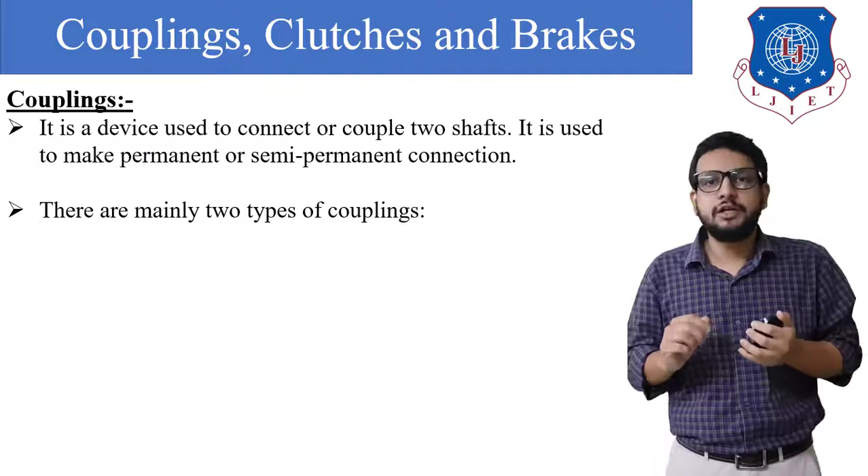Similarly, the other purpose of coupling is to absorb certain jerk and vibrations. So every time whenever we are going to connect a machine, we cannot directly connect a machine to the driving shaft. We need to use a coupling for connecting that. Also, coupling is used for automobile transmission in order to connect the gearbox shaft to the differential shaft. Okay, so in that case universal coupling is used, which provides flexibility.

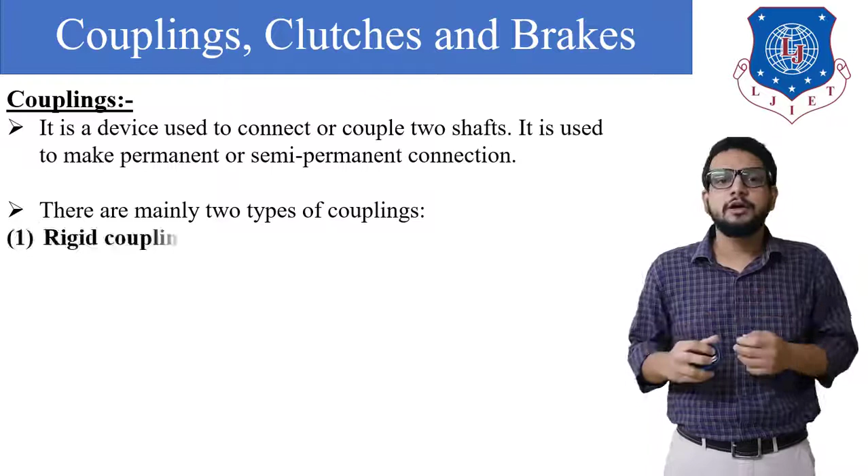Now based on that, there are two types of coupling. First type is called a rigid coupling. It is used to connect two shafts which are perfectly in axial alignment. Now these are of three types. So let us see that. The first type of rigid coupling is sleeve or muff coupling. Second type is split muff coupling. Split muff, as the name itself suggests, the muff coupling is divided into two parts. It has been split. And the third type is called a flange coupling.

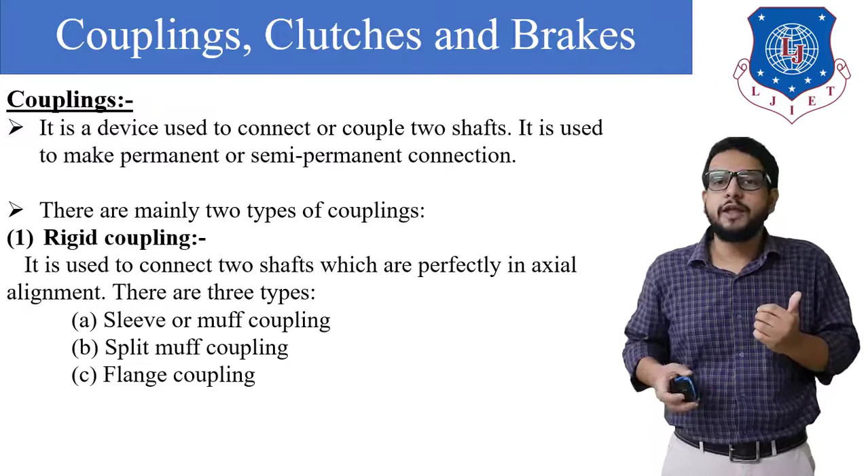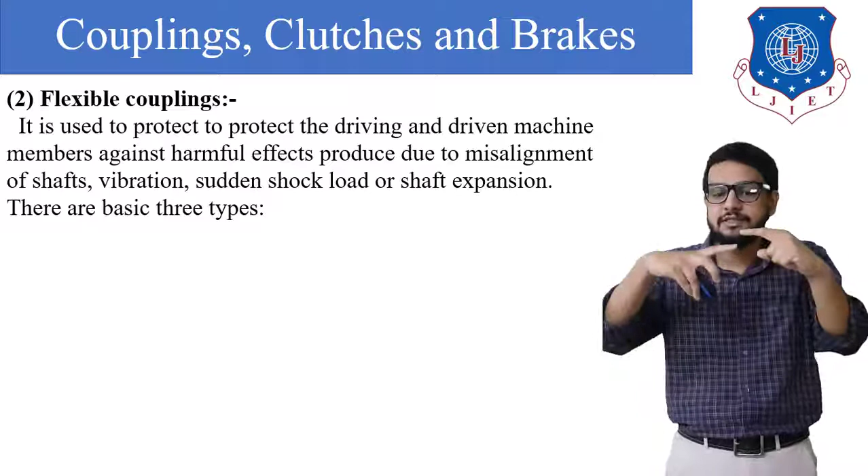Now let us see the next type of coupling, that is our flexible coupling. The name itself suggests that flexible coupling is going to provide some flexibility, right? It is used to provide protection to the driving and driven machines against harmful effects produced due to misalignment of a shaft, which means certain jerk and vibrations can be easily absorbed by this type of coupling. This flexible coupling can accommodate two types of misalignment, first is parallel misalignment and second is angular misalignment. So as you can see, it is written that it provides protection against sudden shock loads and/or shaft expansions.

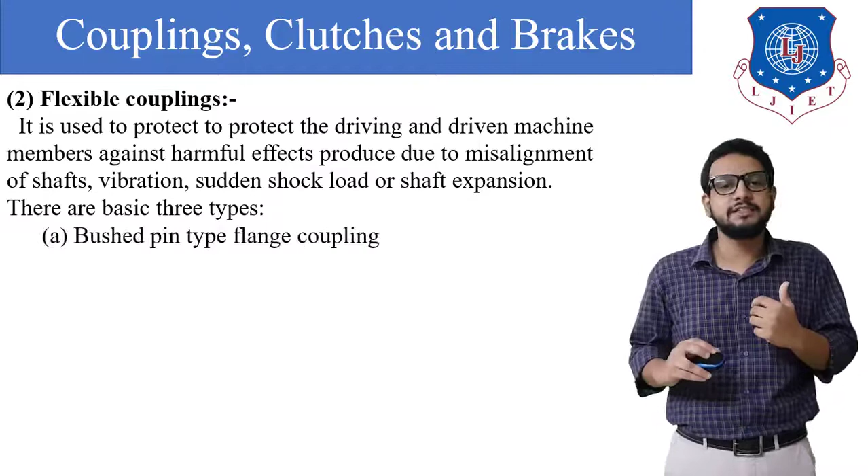Now let us see its types. So first type is called a bushed pin type flange coupling, second type is a universal coupling, and third type is an Oldham coupling. So all these couplings we are going to see in detail.

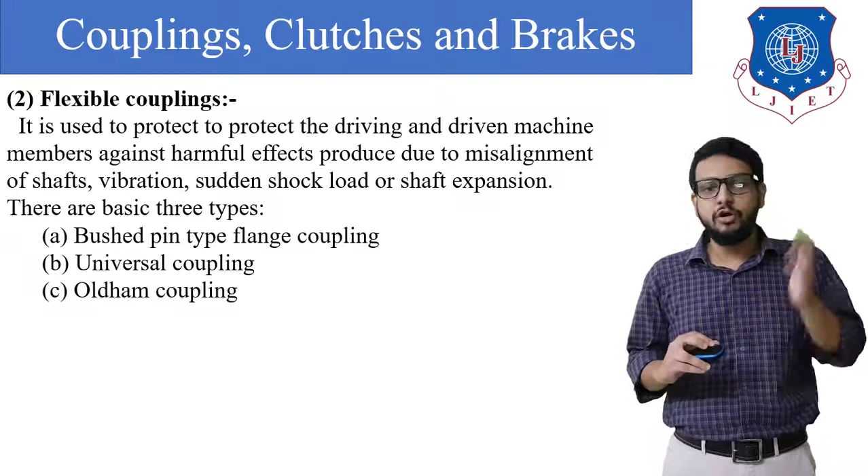Okay, now how is a connection provided? So we have used a key and a muff to connect both these shafts. So it consists of a muff whose inner diameter is same as the diameter of a shaft. The muff is fitted over the end of the two shafts with the help of a key.

Now there is one problem in this type of coupling. The problem is that at the time of disassembly, it is quite difficult to separate two shafts. Now it will be problematic in a case when driving shaft is a turbine and a driven shaft is a generator. Changing a position of a shaft means we are actually changing the position of a machine, which is not convenient to do so, right? It will consume more time. So what is a remedy for this problem?

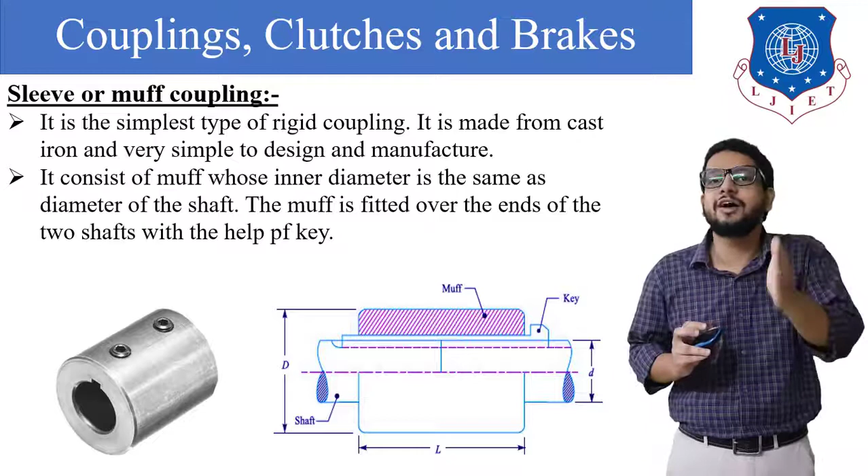Okay, so now over here you need to keep in mind the power transmission chain. So how is it transmitted? So we would say a driving shaft will rotate, it will transmit that power to a key, which is providing a connecting link between a shaft and a muff. From a key, the power will be transmitted to the muff.

From a muff, again power is transmitted to the same key, and then finally from a key the power is transmitted to driven shaft. So this is called a power transmission chain. In this way mechanical power will be transmitted from one part to the other part. Let us see further. So the advantage of this coupling is that assembling or disassembling of a coupling is possible without changing the position of a shaft, that we have discussed now, right?

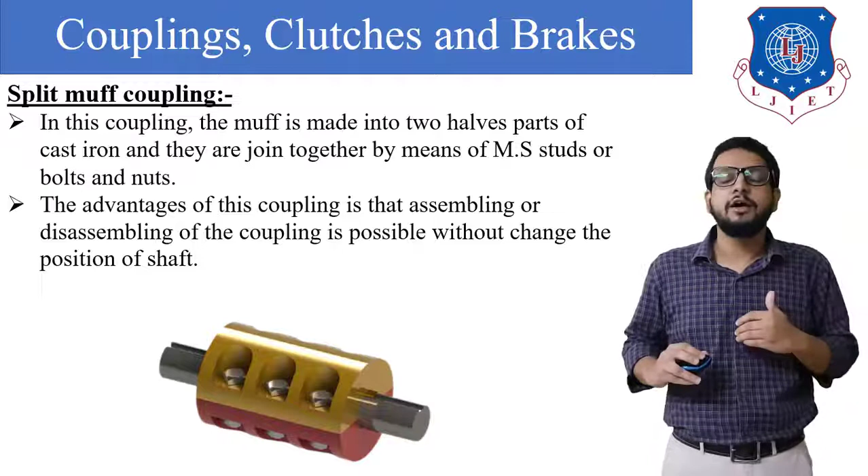Okay, let's proceed further. So the next type of coupling is called a flange coupling. Now in flange coupling, as you can see, this coupling is having two separate cast iron flanges. Each flange is mounted on a shaft end and keyed to it. So as you can see, the surface on which nut and bolt is provided, that surface is called a flange. And the other portion which is smaller than a flange and shown by a black color is called a hub, or we can even say a muff. So muff and flange both are integrated parts.

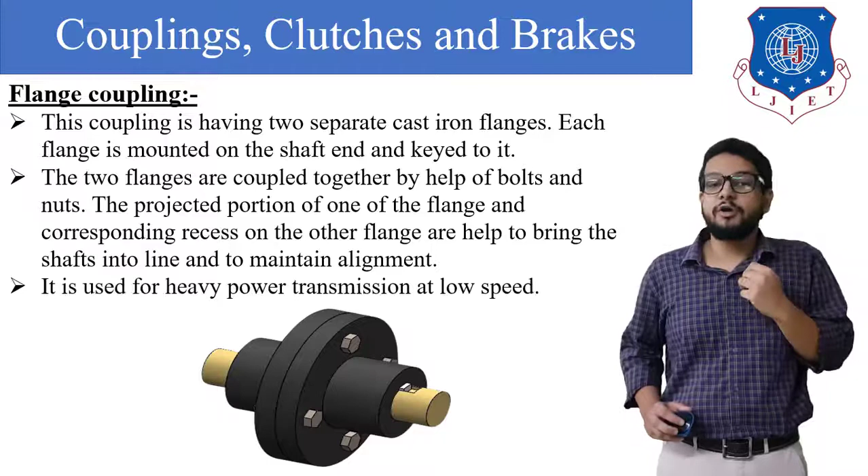Now this flange is connected with a shaft by means of key. So for this a slot is provided on a shaft, that is bottom half portion of a key part is provided on a shaft, and an upper half portion slot is provided inside a hub. So the two flanges are coupled together with the help of bolts and nuts. The projected portion of one of the flanges and a corresponding slot on the other flange helps to bring the shaft into line and to maintain alignment. Now it is used for heavy power transmission at a low speed.

Okay, now let's see the next type of a coupling. Now this is a type of a flexible coupling. Even its name is Oldham's coupling. So a three-dimensional view is shown in which two silver color flanges you can see. And in between, the red color is representing a disc called a floating disc. So compare this three-dimensional view with the sectional view shown over there. So you can see a driving shaft is shown and a driven shaft is shown. Both the shafts are at misalignment.

Now which type of misalignment is there? We would say parallel misalignment is there between two shafts. Now the blue color flange you can see is named as flange A, and the yellow color flange is flange B. In between there is a disc provided.

That disc is named a floating disc, which means, as the name itself says, the floating disc is going to float, right? It is going to perform a motion. Now there are two extruded portions provided on the floating disc, called tongues. So there is tongue 1 and tongue 2, represented by the white portion within the diagram. Both these tongues are arranged perpendicular to each other, and both are resting in a slot.

Now let us discuss the power transmission chain. The power will first be transmitted from the driving shaft to flange A, and from flange A to tongue 1, right? The tongue is a connecting link for flange A and the floating disc. From tongue 1 to the floating disc and finally to tongue 2. From tongue 2, power will be transmitted to flange B and finally to the driven shaft.

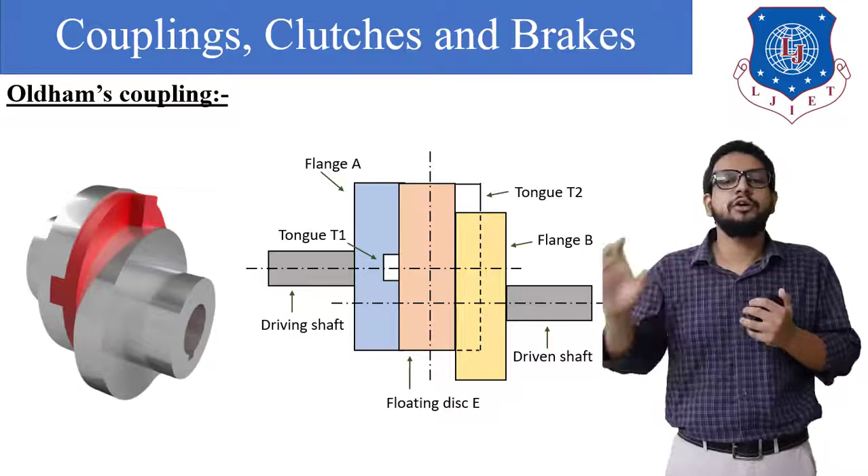At the same time, the floating disc is going to perform a vertical relative motion in flange B. Why? Because tongue 2 at this instant is kept vertical. So because of this relative sliding motion between a flange and the floating disc, power is transmitted from the driving shaft to the driven shaft. I hope you are clear with this concept.

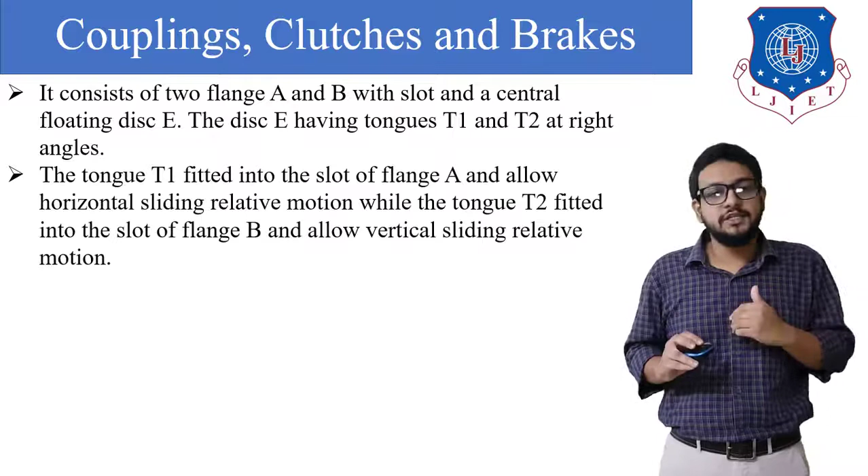Now let us read it out. It consists of two flanges, flange A and flange B, with slots and a center floating disc E. The disc E has two tongues, T1 and T2, kept at right angles. Tongue T1 is fitted in a slot of flange A and allows a horizontal relative sliding motion, while tongue T2 is fitted into a slot of flange B and allows a vertical relative sliding motion.

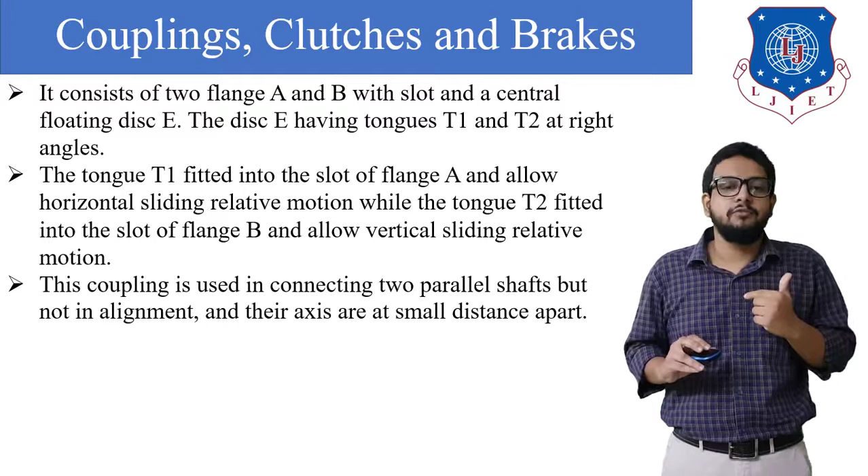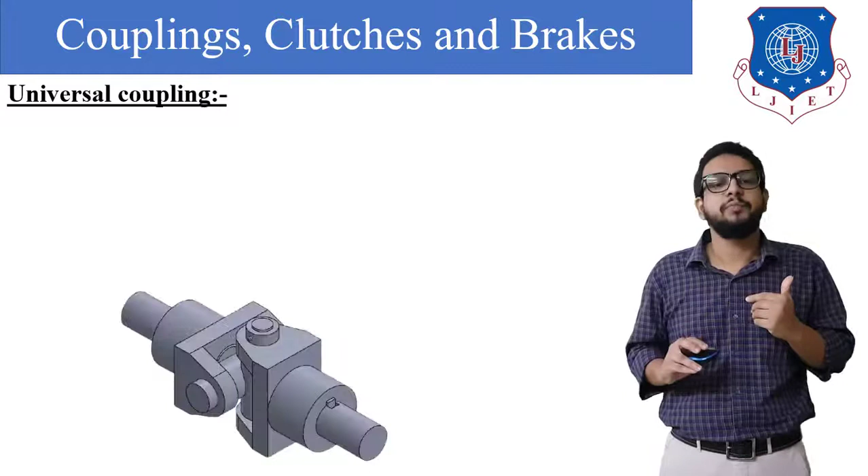This coupling is used in connecting two parallel shafts that are not in alignment, which means parallel misalignment, and their axes are a small distance apart. Now let us see the next type of coupling, called a universal coupling. As you can see in the diagram on your screen, it consists of two similar forks keyed on the ends of the two shafts. These two forks are assembled to a center block by means of a pin.

This coupling is used to connect two shafts whose axes intersect, which means it accommodates angular misalignment between the driving shaft and driven shaft. Specifically, this coupling is used in automobile transmission systems, and it can even absorb jerks and vibrations. Along with the rotational motion, it gives the freedom to change the angle between the two shafts. So this coupling is called a universal coupling.

You can see it is written: this coupling is used to connect two shafts whose axes intersect, and it is also used to connect two shafts where the angle between them may be varied when they rotate.